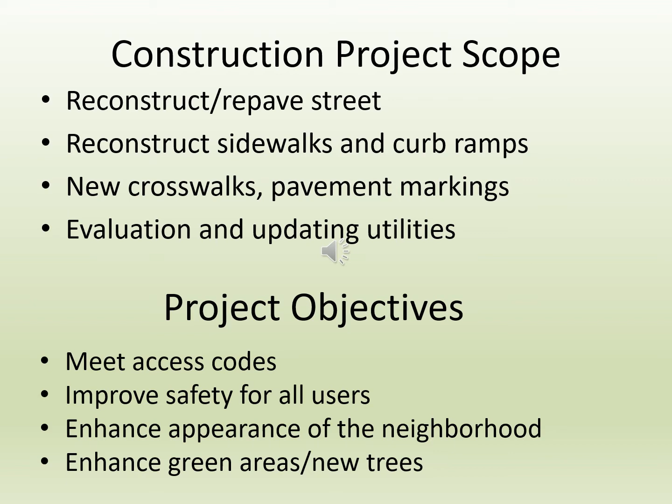This project includes improvements to existing roadway, sidewalks, curb ramps, crosswalks, pavement markings, and drainage. The project objectives are to meet accessibility requirements, improve safety for all users, and enhance the appearance of the neighborhood. The City Council adopted a Complete Streets policy in 2016. The goal of that policy is to design streets to enable safe access for all users regardless of age and ability. Vision Zero is another important policy you may hear about. The City Council adopted a Vision Zero policy in 2016. Vision Zero calls for the elimination of fatalities and serious injuries resulting from traffic crashes, and the city is very committed to this goal.

In addition to Complete Streets and Vision Zero, the city has several other policies and plans that form the basis of our approach to street reconstruction. The Cambridge Growth Policy and Vehicle Trip Reduction Ordinance place an emphasis on sustainable modes of transportation to promote livability, improve air quality, and reduce greenhouse gas emissions. The city's pedestrian plan, bicycle plan, and transit plan emphasize improving comfort, safety, and operation for sustainable modes of transportation. Their goal is to provide a transportation system that is sustainable and efficient and moves people safely.

The Cambridge Climate Plan and recently completed Urban Forest Master Plan document our commitment to maintaining a healthy environment in the face of changing climates. These plans include specific steps we can take to slow down climate change by lowering greenhouse gas emissions and help us reduce impacts of climate change. For example, providing increased tree canopy to reduce impacts of increasing heat waves.

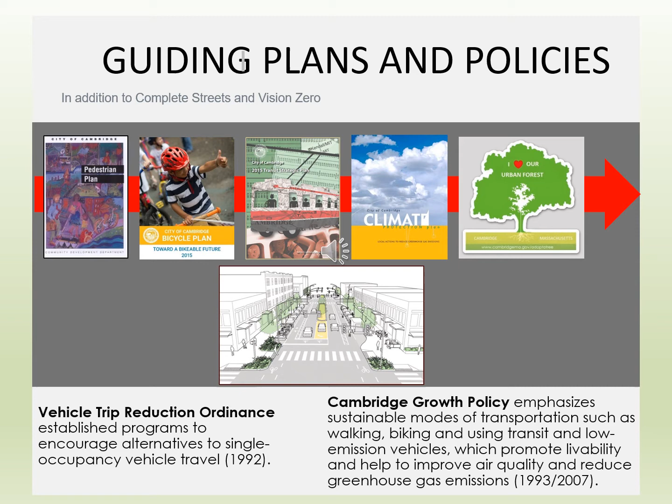All of these policies and plans provide a basis of our design process in a general sense. We then work with residents on a detailed design option for specific projects, as each project is very different in terms of their opportunities and constraints. We take all of this information in addition to input from the community and develop a scope of work for improvements. So how do all of these plans and policies translate to a specific street and sidewalk design? Let's go through some of them, starting with accessibility.

Why is accessibility important? First, it's the law. Both federal and state regulations cover the construction of sidewalks and require newly constructed sidewalks to be accessible. And two, more importantly, it's the right thing to do. We want our sidewalks to be as inviting and usable as they can be for people of all ages and abilities, people using wheelchairs, walkers, or pushing strollers.

What is required to make a sidewalk accessible? We typically think about the condition of the sidewalk. Is it smooth, or are there trip hazards or other impediments to people using mobility devices such as a wheelchair or walker? We also think about the cross slope of the sidewalk. How steep is the sidewalk as it goes across the driveway? As we are reconstructing sidewalks, we need to identify and address these deficiencies. At existing pinch points, the city is required to provide 48-inch clearance to meet accessibility requirements. Where this is not possible, the city must provide a 36-inch accessible path around the existing pinch point. This slide includes some of the basic design tools we use to achieve accessibility.

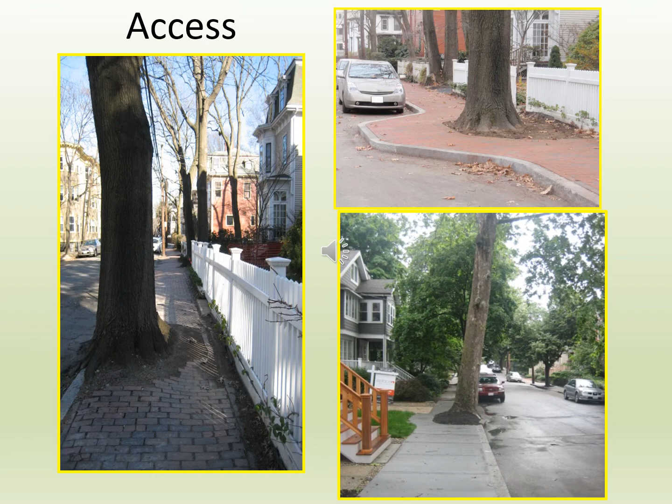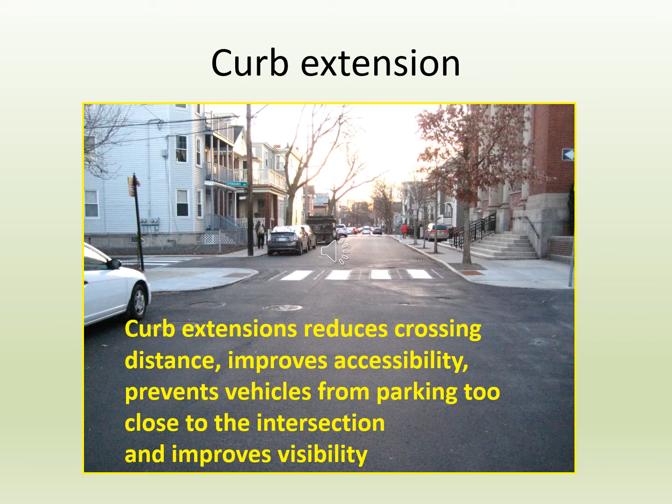Another pedestrian safety improvement is the implementation of curb extensions. Curb extensions reduce crossing distance, improve accessibility, prevent vehicles from parking too close to the intersection, and improve visibility of both pedestrians and drivers. Raised intersections reduce vehicle speed, improve accessibility, and improve visibility.

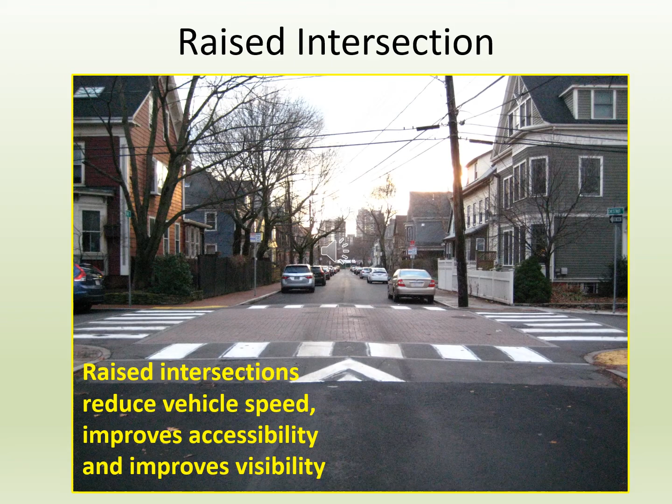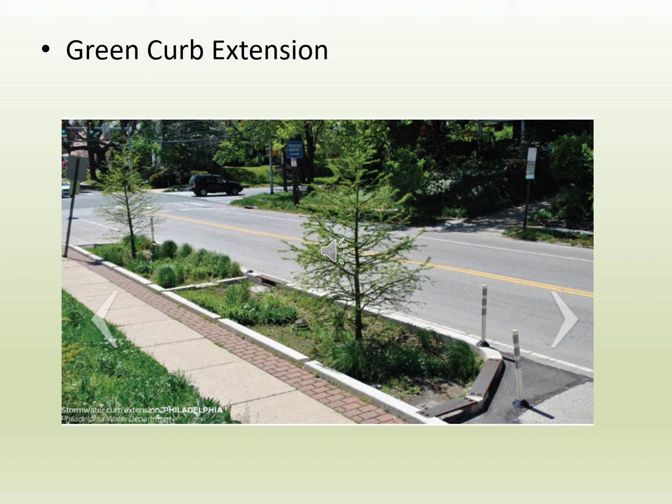Green infrastructure, or GI, is part of our efforts to improve the quality of stormwater before it's discharged from the local drain pipes to the Charles River or Alewife Brook. GI refers to a variety of techniques which use natural processes such as specially selected plants and soils to promote infiltration of stormwater into the ground, or to remove pollutants such as phosphorus from stormwater. The city has successfully implemented GI on a variety of roadway projects, ranging from major corridors like Western Avenue to residential side streets in West Cambridge. We are committed to incorporating these types of environmental improvements into smaller projects as conditions and space allow.

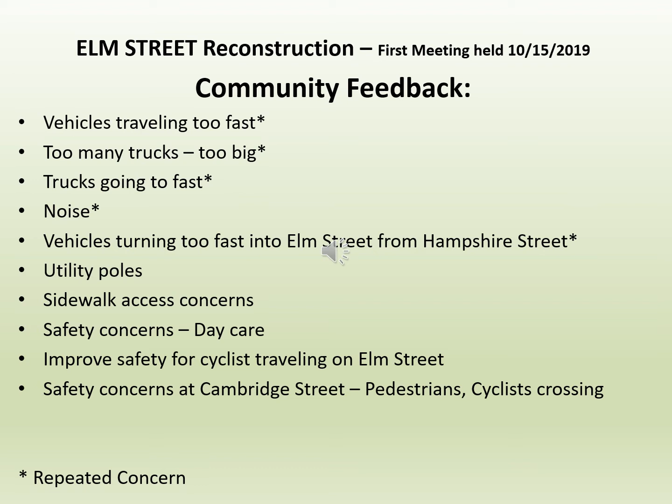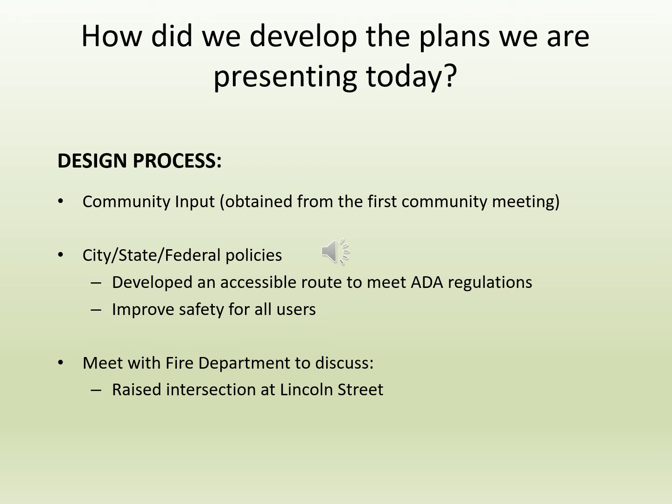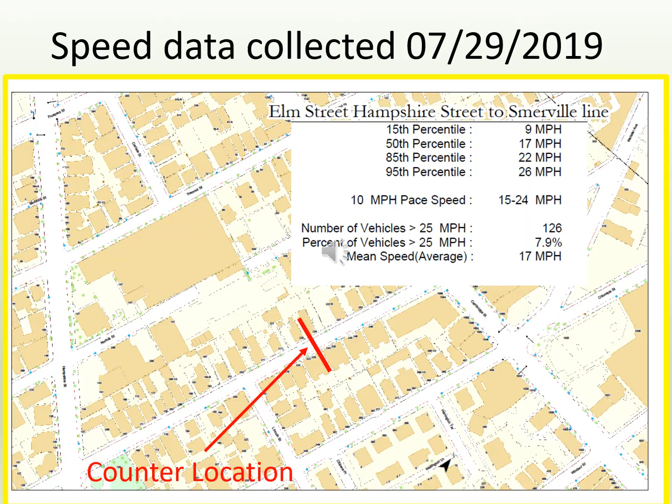The first community meeting was held on October 15, 2019. Residents provided the feedback to city staff as listed on this slide. How did we develop the plans we are presenting today? Let's take a look at the design process. First, community input. This was obtained from the first community meeting. Next, city, state, and federal policies. And lastly, discussions with the fire department. On July 29, 2019, the city collected speed data for Elm Street. The next 3 slides present a color rendering of the proposed draft design for Elm Street.

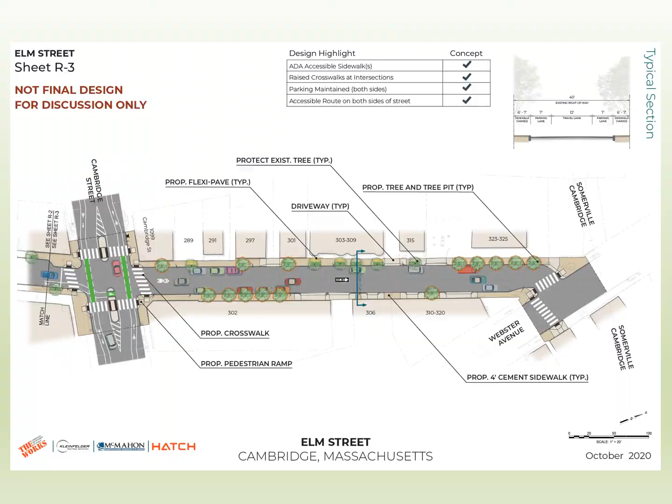Construction impacts are understandably what residents and businesses are usually most concerned about. Construction is disruptive, loud, sometimes messy, and frustrating. The city is committed to working with residents and businesses throughout the construction project. Each project is assigned a project manager and a community relations manager. That team works with the contractor and with residents to ensure that there is clear communication about what is going to happen, when it will happen, and what it will mean for neighbors, whether it's an annoyance of the temporary loss of a parking space or something more disruptive like a temporary water shutdown. Projects in the city have a standard work hour of Monday through Friday, 7 a.m. to 4 p.m. We expect our contractors to implement and maintain safe and effective traffic management plans to assist pedestrians, cyclists, and vehicles traveling through the project area.